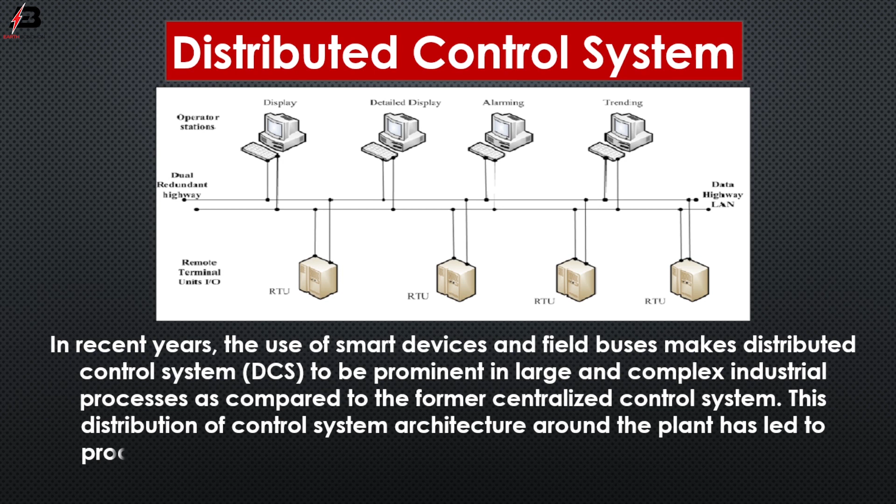So viewers, let's start. Distributed control system. In recent years, the use of smart devices and field buses has made distributed control systems prominent in large and complex industrial processes as compared to the former centralized control system. This distribution of control system architecture around the plant has led to a more efficient way to improve reliability of control, process quality, and plant efficiency.

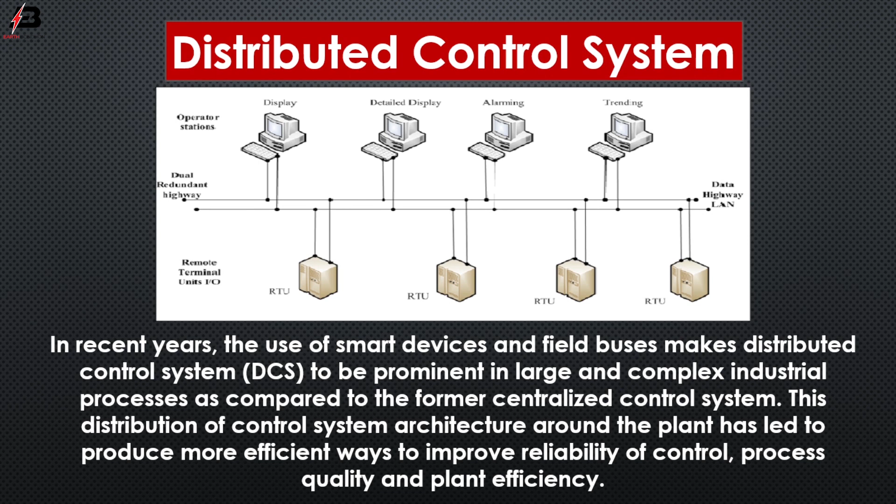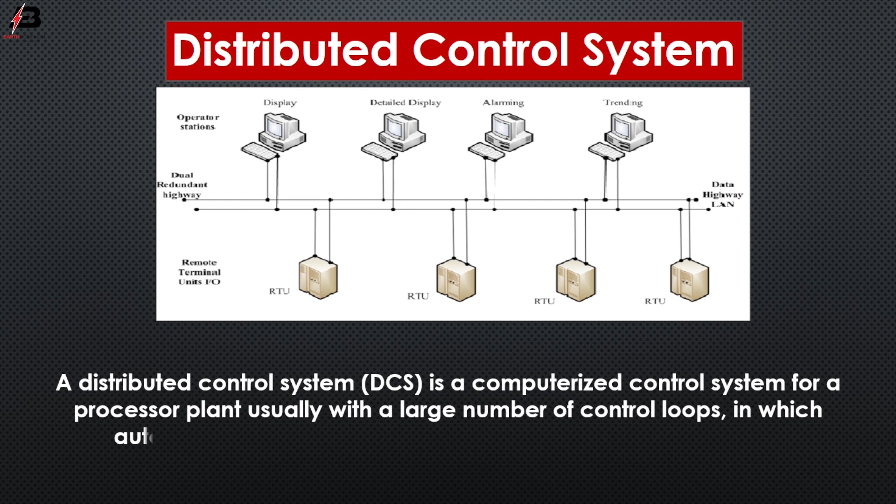A distributed control system is a computerized control system for a process plant, usually with a large number of control loops, in which autonomous controllers are distributed throughout the system, but there is central operator supervisory control. This is in contrast to systems that use a centralized controller, either a discrete controller located at a central control room, or a central computer.

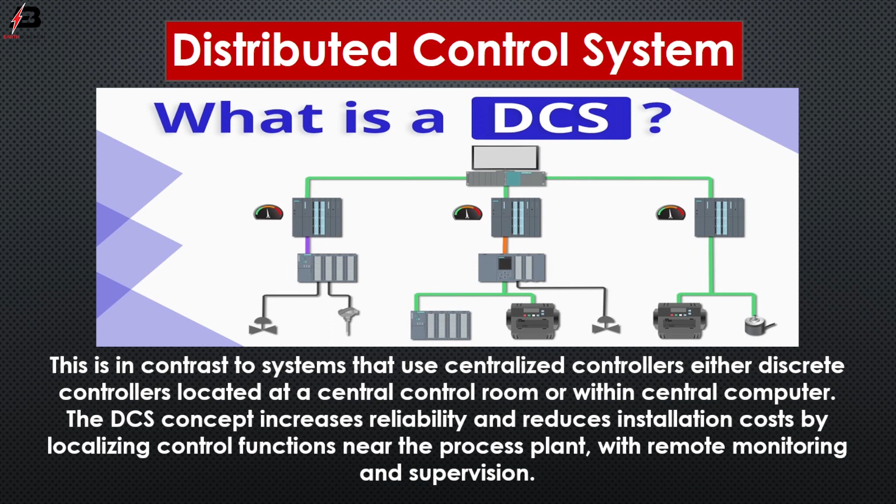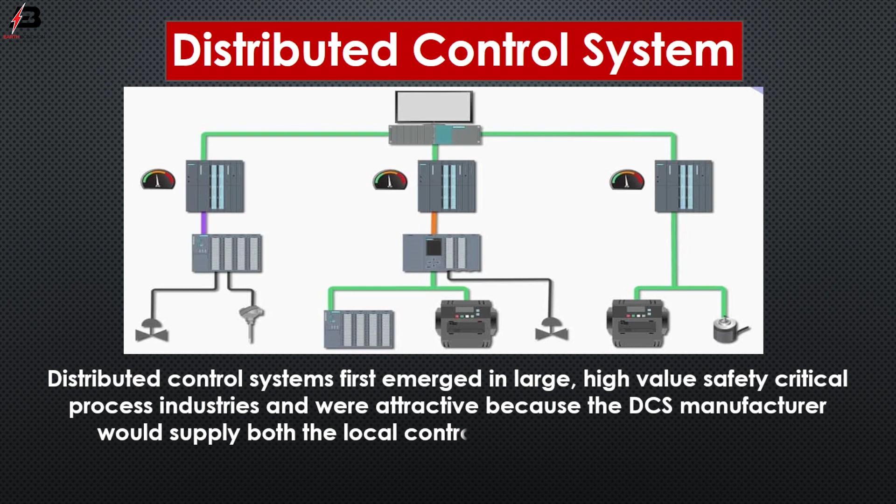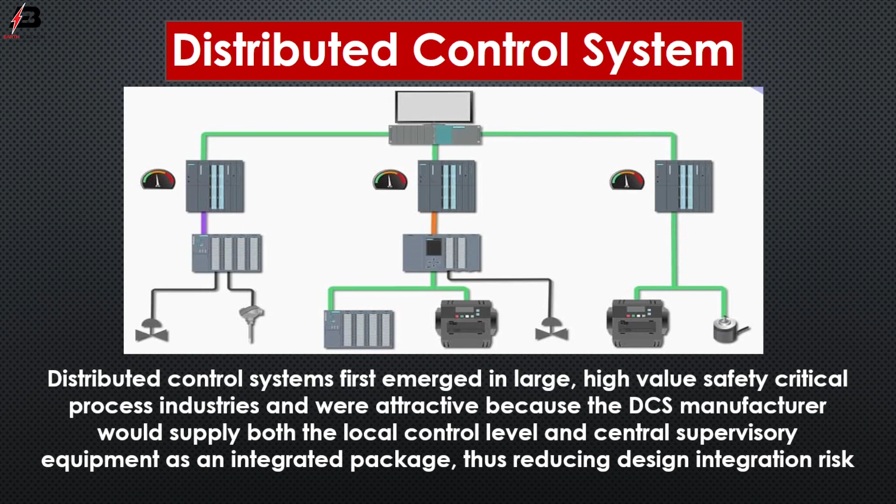The DCS concept increases reliability and reduces installation cost by localizing control functions near the process plant with remote monitoring and supervision. Distributed control systems first emerged in large, high-value, safety-critical process industries and were attractive because the DCS manufacturer would supply both the local control level and central supervisory equipment as an integrated package, thus reducing design integration risks.

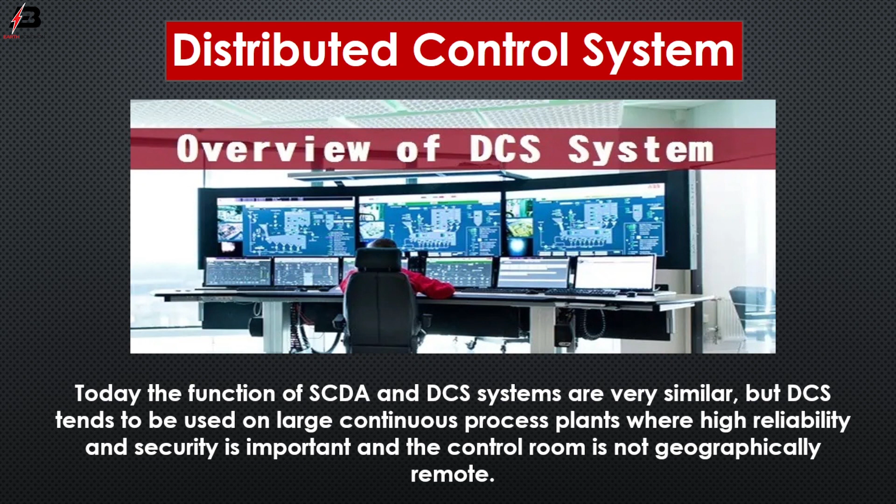Today, the functions of SCADA and DCS systems are very similar, but DCS tends to be used on large continuous process plants where high reliability and security is important and the control room is not geographically remote.

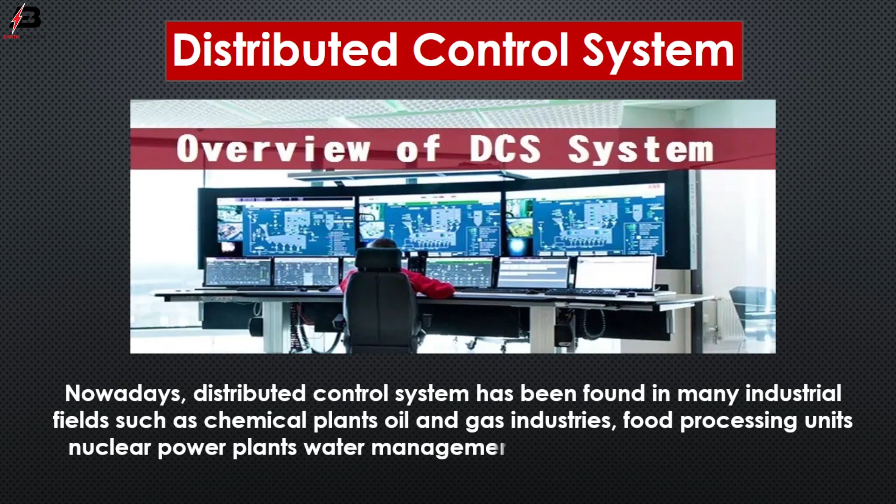Nowadays, distributed control systems have been found in many industrial fields such as chemical plants, oil and gas industries, food processing units, nuclear power plants, water management systems, automobile industries, etc.